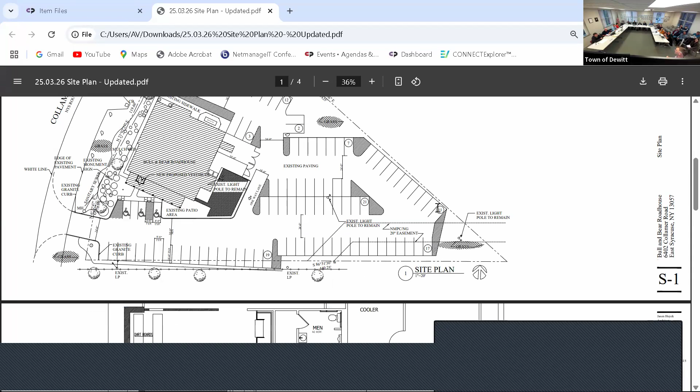Mark misunderstood what he could renovate without getting approval. Because there was an existing metal roof on it, he thought he'd change these tired old cedar shakes and put some metal up on it. You guys pointed out to him that that's not kosher, so he came in. I sent a picture in if you want to show the front facade.

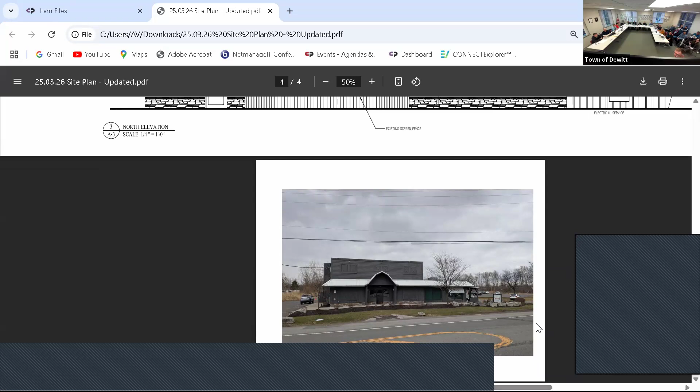You can actually see where the paint cuts across here, that light gray metal. Since we were coming back in for that, he asked me, especially after this winter - his main entrance, the vestibule opens up and cold air blows in - to show a small vestibule at the front entrance, under the existing canopy. Looking at the site plan, it's going to match the material, same board and batten, not projecting out at all. No square footage is being added, since we're now counting under the porches as interior restaurant space.

Really, we're not adding any more lighting or heat in that space - it's really just a way to stop the cold air. Any questions?

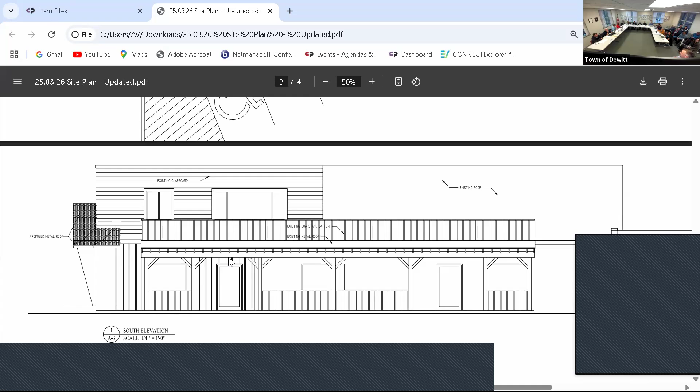Changes to the drawings that we talked about. Yeah.

Any further comments? I'll make a motion - this board approves the site plan dated 2/17/2025, with the following findings and conditions. This board approved a site plan for the site dated October 24th, 2024. This plan presents two minor modifications for a change in materials and a vestibule addition to the entry. Modifications are approved with the condition that, except as specifically modified herein, all findings and conditions of the approval of October 24th, 2024 are in full force and effect and unmodified.

Motion to approve. Kathy, Dave, all in favor? Great, thank you.

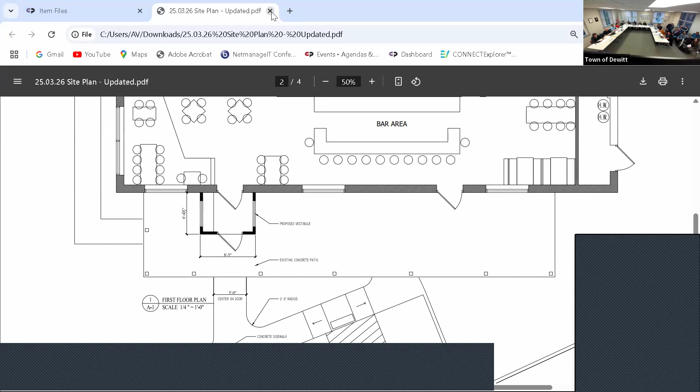Okay, I believe we have two items to finish off the review. The first one is the lighting plan, the study. Some of the areas within 10 feet of the property line were down into the range of 0.3, 0.2, 0.1 foot candles of spillover beyond. So we're not meeting that, go down to the L3.

Yes. Basically, along the road, we're varying between those levels of light, same kind of thing. Adjacent parking lot to the north is there. The creek area, which is overgrown wooded areas in the back, and the bottom down here is along

the easement, which is sort of a quasi-public street. So what we have is a very difficult site, and I think because it's an existing site, we have special conditions that can't really be met to the letter of the ordinance. The other issue is up here, there is a New York State street light, which is putting out way more than the 0.1, 0.2, 0.3 foot candles.

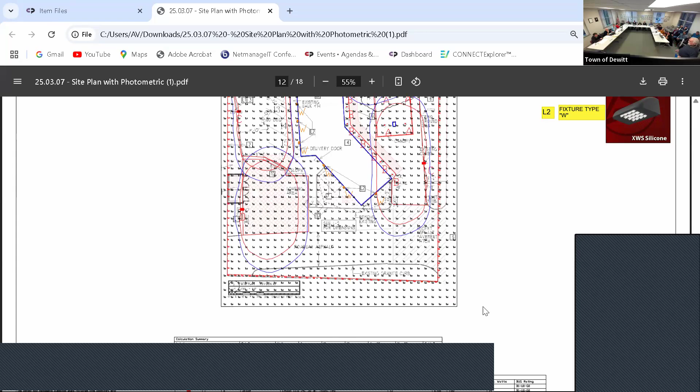Yes, the street light is a pole. This is an existing pole. That's a pole, that's an existing pole. This particular one here is a new one that the lighting designer put in in order to give enough light for the cars to go down the driveway. So that is the only new one, and again, it's cut off and we're down in less than a foot candle in that area.

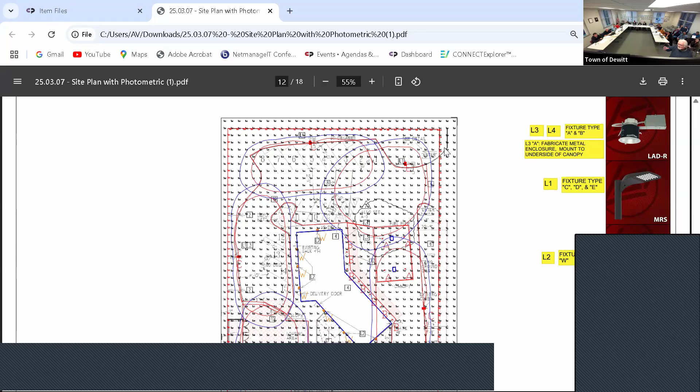So really the only issue and the only area that we have is in the upper right corner, for the most part. Not really, I mean, that's going to be the brightest part. Down here, the next street light is on the other side of the AmeriCU Credit Union. So anything that's spilling over onto that sidewalk is I think even outside the range of the street light. But yes, that corner is where it's the highest, it's the highest point through it.

And these numbers take into account the existing streetlight that we can't do anything with? No, that was not part of the study. This is just the existing and new fixtures on the site, what's contributing to what's already there. You say the spillover is 0.3 foot candles? Yeah, code is 0.1. That's imperceptible, yeah, it's a rounding error. Right.

Yes, and you spoke with DOT? DOT has no issue with these numbers, right? No, I think their comment was that they'd appreciate any additional lighting because it's very dark, dangerous. Okay, your comment was something like, make sure that they're not tipped up because that creates glare. Right.

The only other thing is, can we just make sure that the foot candle requirement for the board, we can accept it as shown. And then the only other issue that was raised today was just the signage.

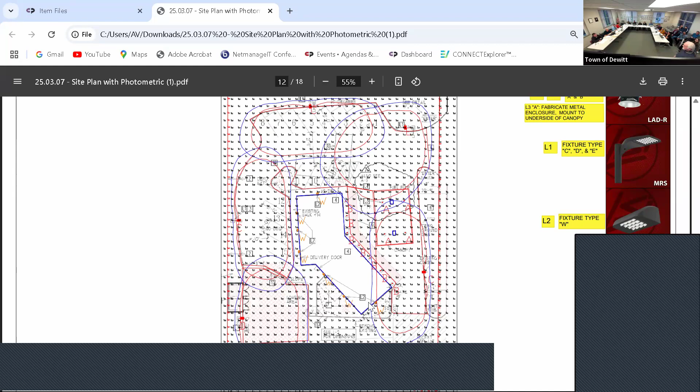Yes, go up a couple of sheets. This is site directional. Okay, this is what DOT wants, they want regular street signs. So at this point you'd basically have a one-way sign here, a one-way sign here, an exit sign, do not exit, do not enter. So they basically want road signs all the way around.

Go down one drawing. What we have proposed, it takes it a minute, were little signs that said entrance and exit. So this is just creating a one-way flow around the site. Yeah, but that's what we already had gone through, the circulation around the site, and the signs were necessary for that one-way circulation through the site.

So basically DOT wants big road signs. Right, it was set up as a one-way. I had them meet the code for directional signs, which is like 2 square feet, taller than 3 feet high, and then DOT said just... So basically they have asked for that. I'm revising drawings and sending it back to them, but tonight we just don't have the approval from DOT yet. Right, but you're doing what they asked. Yes.

Okay, I think those are the only two items we need to address. Is that on the dumpster?

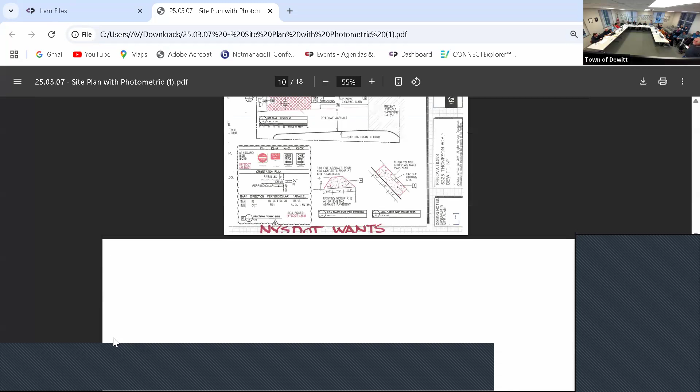Can we run through the architect? It's been a while since I've seen it. It's not changing too much, but do we want to start all the way through? Yeah, let's just give a quick overview of the architecture.

Okay, originally this started off as an interior renovation. It was originally two businesses within one building. There was a dividing wall down the center - this was sort of a fast food takeout, and this was a quick market grocery store kind of thing. The existing building is probably from 1960s to 1980s, somewhere in that range.

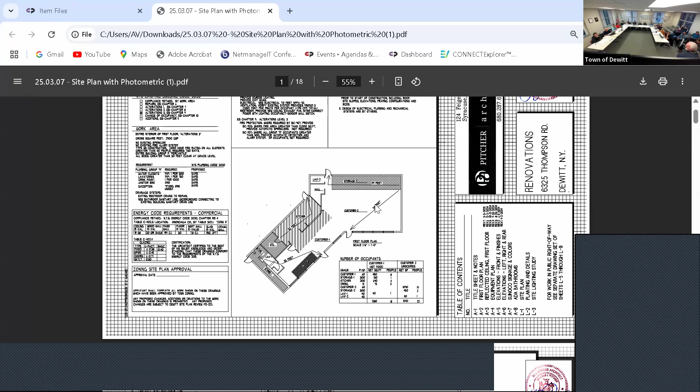So basically we're doing the interior renovations, pretty much a gut rehab at this point in time, and a lighting plan for the new ceiling. This is the typical layout - we're gonna have the commercial kitchen here, a couple of seating areas here, this is basically grocery store, and the fuel pumps are out here.

Let's go down. The color is corporate Sunoco blue. What we're doing is the existing siding, we're putting on a veneer, concrete stone veneer for the base, and then above that, we're putting on new siding, cement board siding.

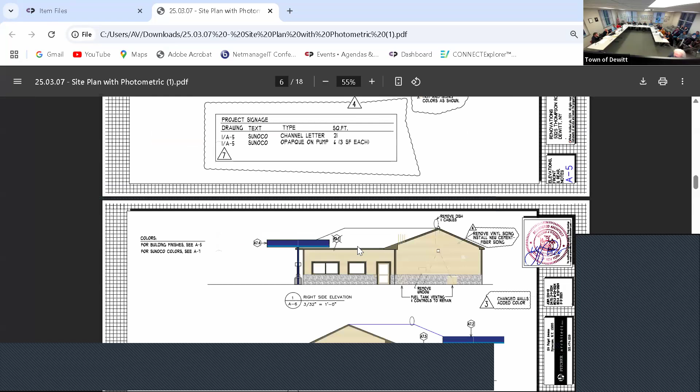But the building itself is pretty much staying the same. It's just doing the exterior. The massing is staying the same. And so we have new colors on the canopy.

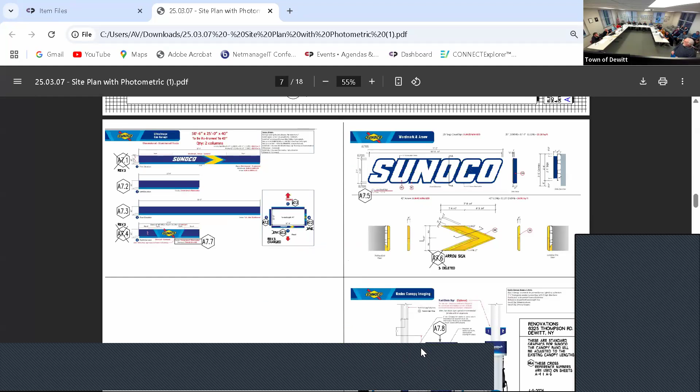We have all of this, this is the back entrances. Canopies are not being rebuilt - just being covered with the new color, with the corporate color. The existing structure is good enough.

You have a cross section through, just a typical exterior wall cross section? It's a stud wall. For the cladding material, it's going to be on the outside of the sheathing. Do you have a section? No, I didn't draw this section.

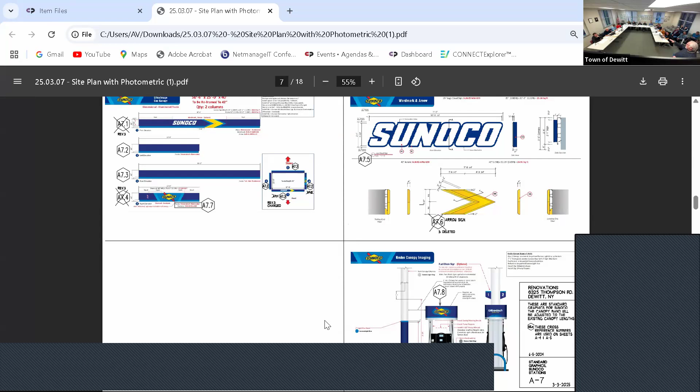How are you transitioning from the capping, just the top course of stone? Yeah, it's basically a 4-inch veneer, like a brick veneer. I'm not sure if that's what it's doing. Is it a water table band continuous, or are you just...?

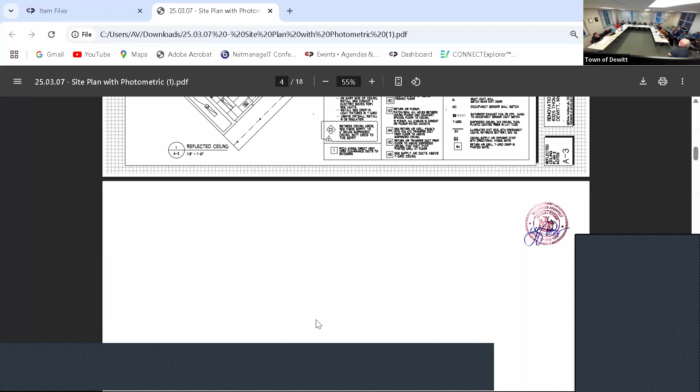They didn't show that on there. But I mean, you could flash it also. The material, the transition material between the stone veneer and the cement board siding - I didn't do anything particular, it's just the top course of the veneer. We'll have to work that detail out in the construction.

I'm gonna try going out. The canopy logos - is there any imagery on the canopy?

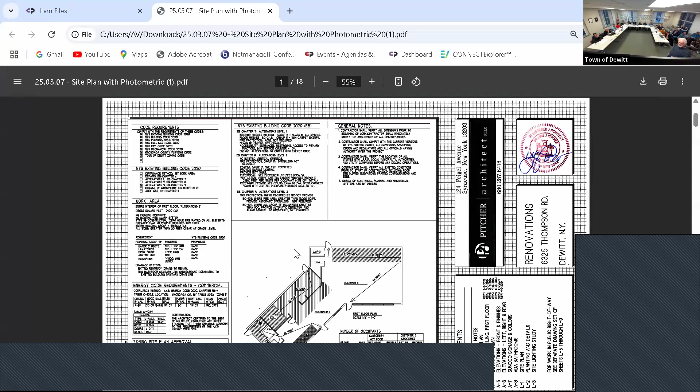If we go down to about 4 or 5 - I think initially they came in with Sunoco branding on it and then they wanted it removed, and that was removed from the canopy. It is shown further down, so we're gonna...

So it has to be modified - no, keep going down a little bit. There. Yeah, and these are crossed off. Those were things that were deleted. You didn't want the logo on there, so I just crossed it off.

So that's how you're tracking the revisions? Okay, it's shown that they're not on there, and the same with the one in the upper right. In the upper left corner of each one, it's misleading - this goes back to if we look at it in the future. The top left corner of each sheet, we'll add that no signage is permitted.

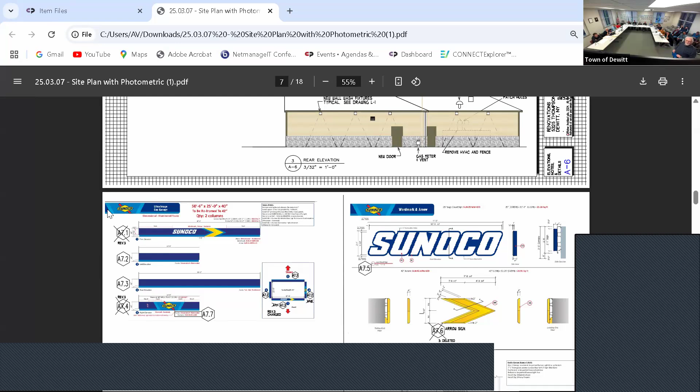Okay, let's go to the next one. What is the purpose of leaving them on and just putting an X through the call out?

That particular information is a JPEG from the corporate office. I didn't have the access to edit that image, so to show that it was deleted, I simply put that deletion on as a revision.

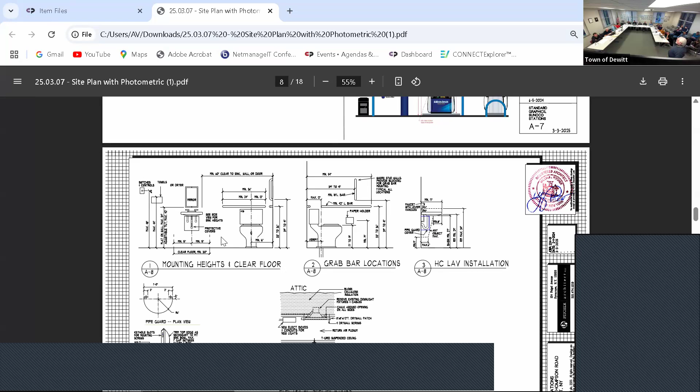We can go past the restrooms. Okay, now this particular part of the project is the worst part of the asphalt. Most of the other asphalt is in reasonably good condition.

This part is going to be redone. We're adding a new sidewalk here so that we have - basically this is a loading area so that they can load in from the rear, and it's also to give us room for the dumpster to get in and out of the dumpster enclosure.

And basically the flow is parking down, out into the street. Either way, the flow from here is through the pumps and out.

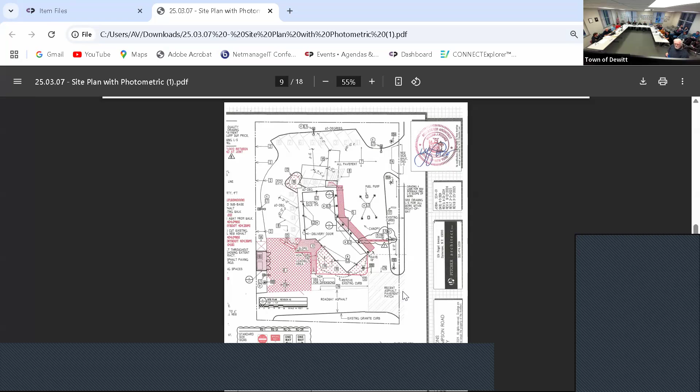The current asphalt comes up to the sidewalk with no defined edge. So we're removing about 4 feet of asphalt and revealing the edge of the sidewalk, which will have a 4-inch curb along the sidewalk separating it. We're putting in a new handicap ramp to the entrance doors and to the sidewalk here.

Light fixtures, existing and new. We're basically putting downlights on the walls, and under the canopy we have a series of downlights along the front of the building. Let's go to the next one.

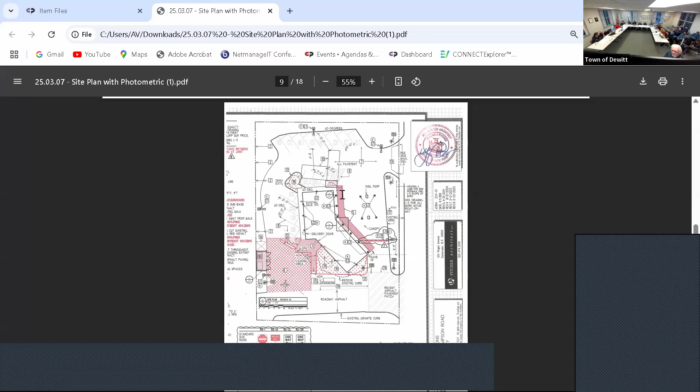That's the sign. It does not want to come back.

Okay, let's go to planting. Of the various plants, this was a particularly difficult spot. What we had in the zoning code were basically 50-foot honey locust trees, and we're sitting in a band that's about 12 to 15 feet wide along the sidewalk and the property line. So I'm proposing some very tall, narrow trees for this planting to meet the requirement of trees every 25 feet. The planting along the other parking lot is going to be several flowering bushes, towards the neighbor, and the neighbor's parking lot will have those plants. That's about it for the planting.

This is the sidewalk in the back for the loading area. You do have a sidewalk along the road - yeah, that's on the DPW drawings. With the coordination with the trees, the sidewalk is actually along the property line here, so the trees are on the grass just inside the property line, wedged between the curb of the pavement and the sidewalk.

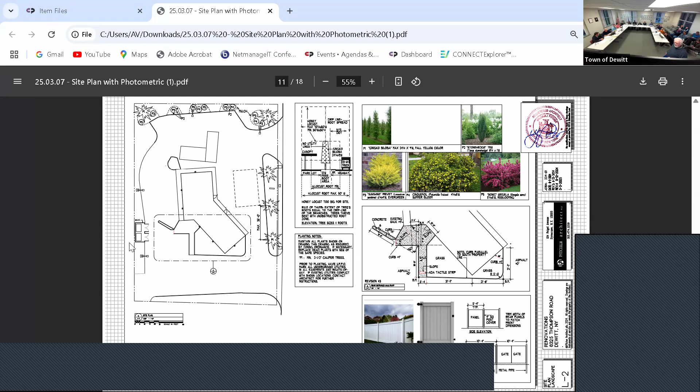The fence for the new dumpster fence will just be a vinyl fence. Next one is our lighting.

Okay, this is all of the DPW stuff. Basically they want us to treat this one as if it's a driveway, so it gets a new concrete sidewalk cut into the asphalt. They want to treat this one as if it's a street, so that's just simply a painted crosswalk at that point. We're going to be putting in the sidewalk along the street curb, and we're going to put in ramps at each of these - that's an existing ramp there. They want a stop sign and stop bar. All of these arrows show the flow around the site, how the one-way works, so this diagram shows all of the site work.

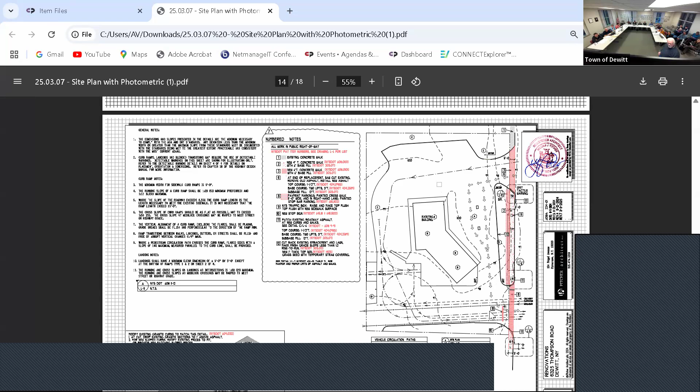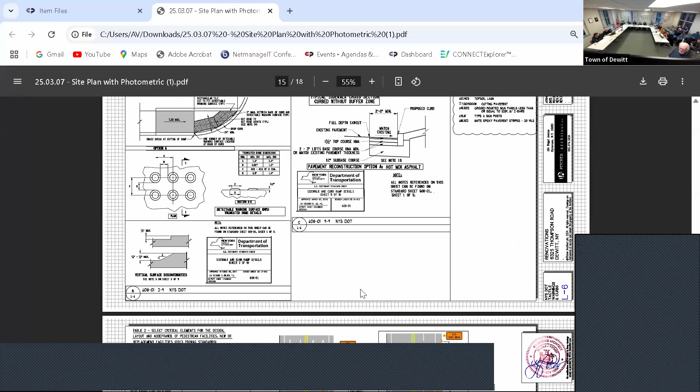This is the typical handicapped ramp - it'll come down to a ramp, tactile, dropped curb, and then either the asphalt or the sidewalk. These next ones I don't think really do much for you - it's the handicapped, typical DOT stuff. One more, and we have in here...

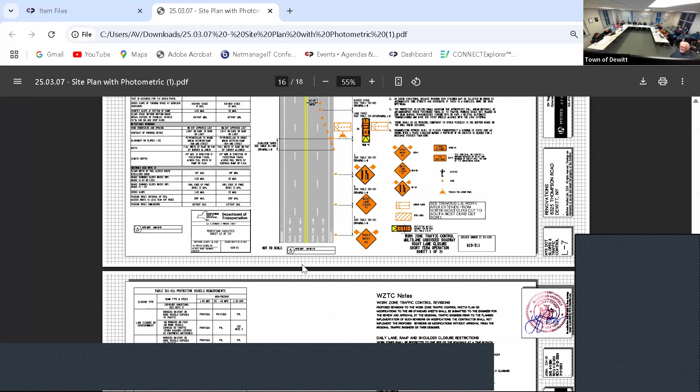We have in here the traffic plan for when they do the curb work and we have to close down the one lane. The DOT and I would work that out. Okay, that's pretty much it. Any further questions?

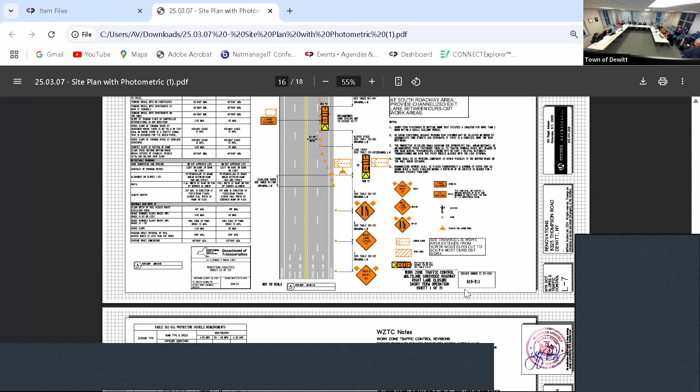The ginkgo trees - a lot of times the varietals come in males only, because the females have a fruit that will drop on the sidewalk and stuff. So specify that, yeah.

Good, so we can... I'm looking up, is there no additional comments?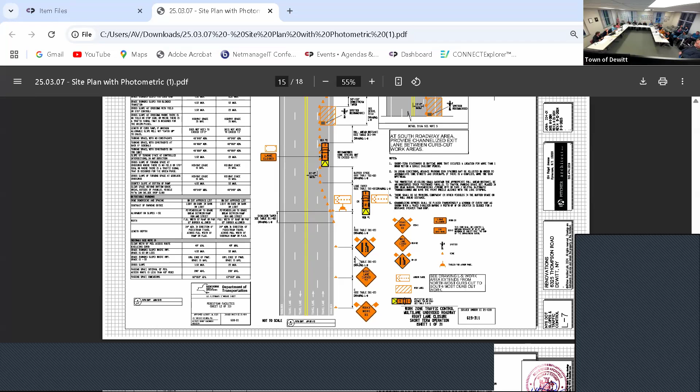I think you need to clarify, going back to the stone - if it's not clear on the drawings what you're installing, you can't wait till construction unless you're gonna come back to the board to clarify how you're gonna build the exterior cladding. So I think we need to put that in the minutes, stipulate it at this point.

Sitting on, the stone is thick - what's it sitting on? A wood frame building, which means the frame is right up to the foundation. I would just like to see that top band kind of articulated, not just the ending of the stone, which is kind of a coursing - just to have a clean line. It could be a precast element with a drip that carries all the way around. Yeah, it's the water table that sits on top of the stone. We can basically do that with a concrete block, a flat block, to match the color of the stone. I think we're talking the same thing - it's a precast element that typically comes with your stone veneer, a water table cap, pitched. It would have a slope. Yeah, we can do that.

I'm just gonna jump back to the soffits at the front left corner - according to the pictures, it's destroyed, so I assume you're reframing the subfascias and all that kind of stuff. That's an old photo, it's already been rebuilt - the structure's all there. We're just putting new siding and new veneer on the existing shell.

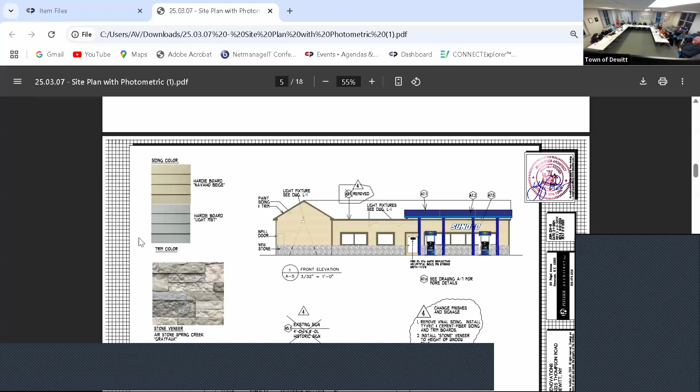This is a refurbishing of a vehicle service station, which is a permitted use in the zoning district. The applicant and board have acknowledged that this is a tight site with an already existing structure. The applicant has worked with the board to redevelop the site, use considering the constraints of the site. This board recommended, and the zoning board of appeals granted a variance on November 25th, 2024.

To allow for 15 parking spaces on the site where 19 are required by code. This board has reviewed the Onondaga County Planning Board referral of 10/23/2024, which determined that said referral will have no significant adverse intercommunity or countywide implications. This board has reviewed the SEAF of applicant dated 5/11/2024 and grants a negative SEQR declaration for this unlisted action. The site plan dated 3/3/2025 was modified to include changes to the directional signage and accordingly the entry exit scheme for vehicles as requested by the New York State DOT.

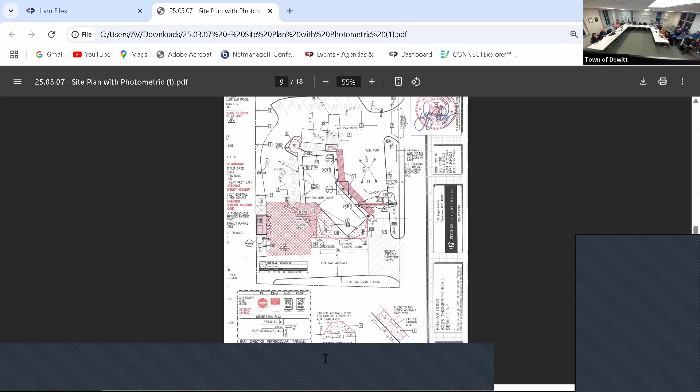All right, National Grid. There's something.

Hi, how are you? Good, how are you? Good. Kathleen Bennett, Bond, Schoeneck & King on behalf of National Grid.

The fence detail, I had trouble figuring out which drawing - it was recently updated, right?

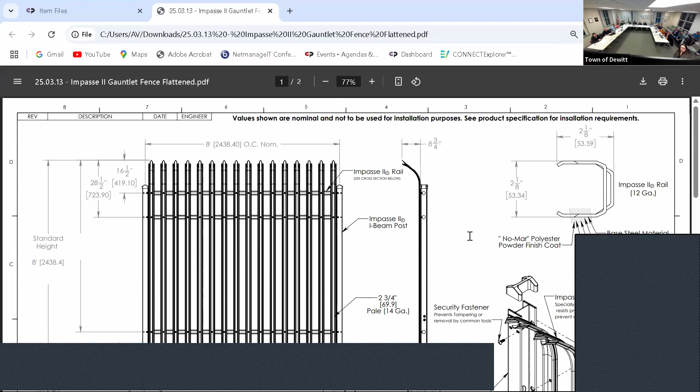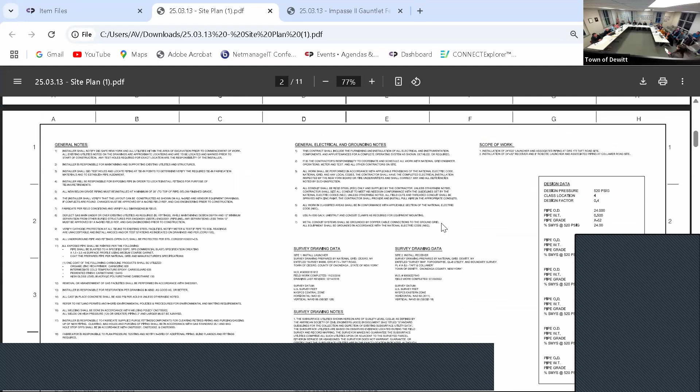Sorry, and that's James Coffey. I didn't realize he was online.

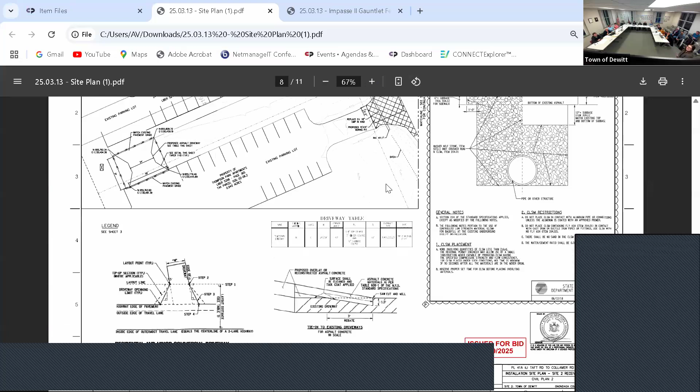And then they can provide the cut sheet behind it, with the drawings. It's right on that page there, about mid right. Yes, the cloud matches up with the cut sheet product. Correct. And the most recent cut sheet we submitted, we took off the references to all of the others, so it would be the same.

More questions? So it sounds like the DEC process is faster than anticipated, it's moving. Got it. Yeah, we got the permit. We're still in projects, so-

They also weren't impacting the wetland buffer, and you guys got your permit in pretty quickly. We're not sure.

I did mention it to a couple of applicants and they're like, what? It did take almost a year to get the permit. Well, you knew there was wetlands there, so you guys were already working with them, it wasn't like, hey, you need to submit this. You had the permit application in prior. Yes, okay, that makes sense.

They were just waiting for this board to do the SEQR to complete that permit process, so.

Okay, I've got a little bit to read here, so. There are no other comments?

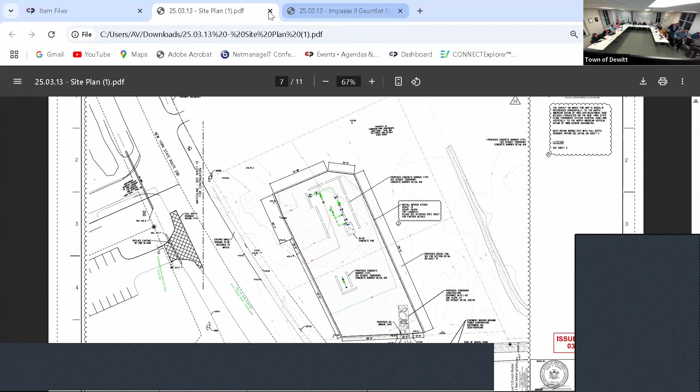Okay, next up, First Tee Clubhouse Addition.

Hello again, welcome back. I know Peter gave everybody a little sheet explaining what the First Tee is, but does everyone know roughly what the First Tee program is? So a few years back, the First Tee took over the property and had the outdoor golfing.

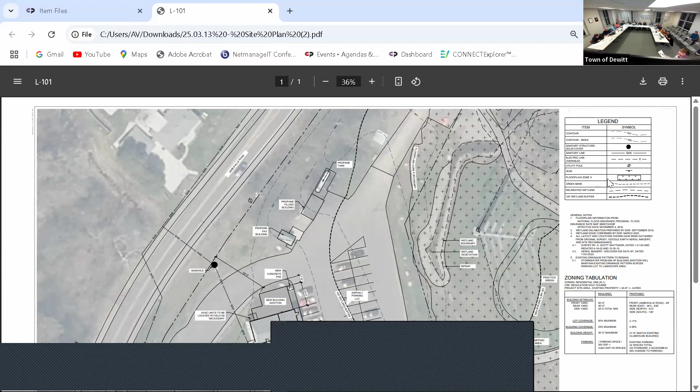They found that they needed, on rainy days, to expand their seasons. They wanted to put an addition on to get some classroom spaces. At the time, we built this classroom, more of a conference room/classroom. It's worked amazing. The program has grown tremendously, and at this point they have an indoor simulator they use for rainy days.

They needed a space to have a second indoor simulator and another classroom. The population has grown to the point where they need more space. Not really trying to bring in more people, it's trying to accommodate the people they currently have. So we put an addition on the back.

It kind of matches the roof lines, but a little bit differently. This one has a gable roof here with a little shed coming off on that side, then there's this gable roof running 90 degrees. For this one, the gable roof runs the same as the front portion, but this is more of a shed roof on this side and the gable there, so it shifts just a little bit, but the materials are gonna be the same: clapboard siding, painted the same, same roofing.

It's the same scale to the whole structure, and you really won't even notice the difference. You won't be able to tell what's an addition and what's not. So that's what we're looking for. Go to the architectural.

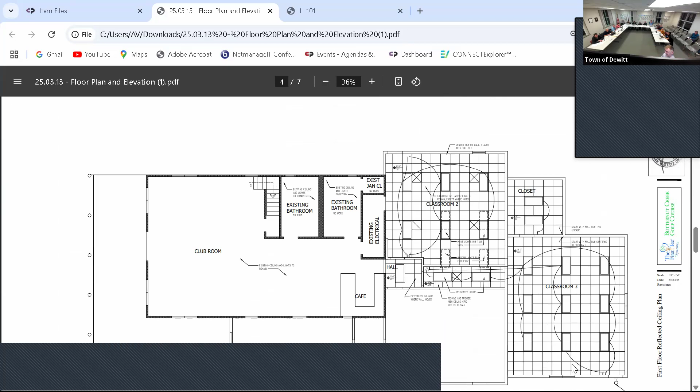So when we're looking at this, we should probably have you modify this one. So this is the classroom, this is the addition, this is all the existing building.

On the first part, can you just graphically make it clear what's new and what's existing, making new darker and existing lighter, just so that it's clear. That's all really the roofs. When it shows PDFs the line weights get messed up, but I can gray it. Yeah, if you wouldn't mind.

The bottom right, we've got that extra set of double windows there, which is underneath the porch. So that doesn't actually exist, which is the same on the other side.

Top left, you're just over to the left too far. Top left, bottom right, those two. You're not proposing to infill that porch facing the driving range, correct? No, it doesn't go to there. Actually, let's go back. I'll be honest, I didn't look at the existing, it was from a long time ago.

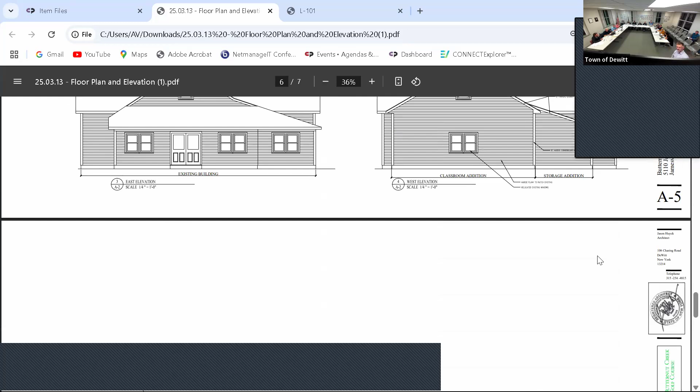So this is the existing ridge. That's that old addition with the cross ridge, but this new addition's ridge is here. So like I said, it's kind of mirrored. The pitches will be the same, right? So these should be 7/12.

Actually this was 8/12, so it was slightly different, that's right. I was trying to keep the eave line, it got wider, no this is wider. I was trying to keep that ridge lower, so that's why I had to shift it down.

If I go to 8/12, it's gonna be higher than the other one, or you'll have to push down on the eave lines, right, but they need the 10 foot headroom for the indoor driving range.

Oh, no, that's significant, right? No, okay.

Materials all match, windows will match. Any of the lighting on the building, I think I saw one wall pack — we're doing, I'm sorry, we're just doing an emergency light over the door, lighting for egress.

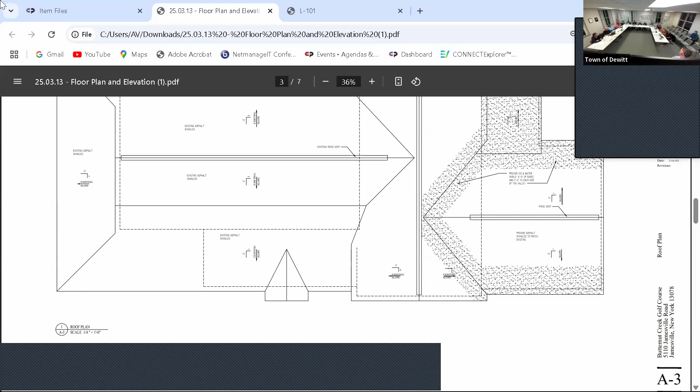And will they have the site plan on it? Yeah. Yeah, the units will have to be pushed over a little bit. Yeah, they'll have to be relocated. No, no, you gotta go to the other- we gotta go to the site plan.

Yeah, this top- excuse me, Jason. There, well, you can see the well runs through. Yeah, so those will end up probably just getting swung, either kept right there or swung right around the corner here. Remember, this is a pretty steep drive, so you're not gonna really see it in that area. I think as long as we cut it off and make it so it becomes- none of that can be seen from the road.

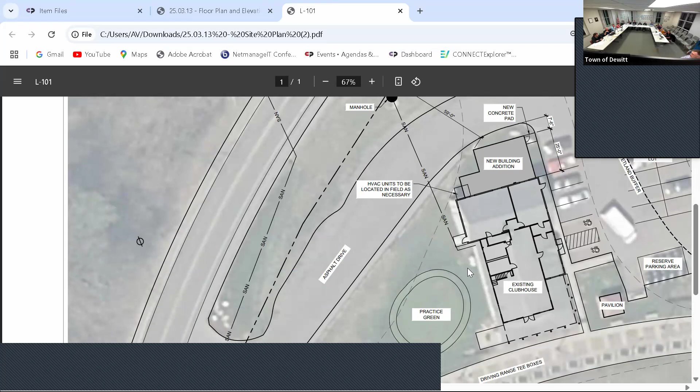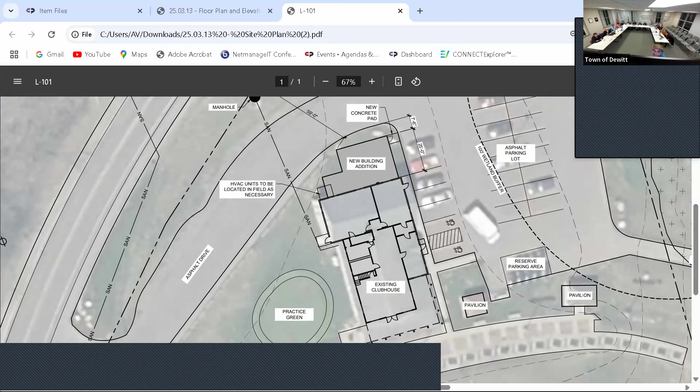So with respect to the DEC delineation, can we talk about that briefly? We had our group go out and walk it just earlier this month, the wetland over in this area, if we pan to the right. Just to do a site walk and reconnaissance here.

And then this line represents our 100-foot buffer. So we are outside that. Yeah, we have no work inside the 100 foot. Correct, no.

So the assessment that they're putting together for DEC, can we get a copy of that? Sure, yeah. So what's the procedure here? Is this going to need review or not, because we're not touching anything, not doing anything in the buffer? It has to go to DEC. So it has to go to DEC, but we don't necessarily.

I think we have similar language we did for another project, right, where we're like, hey, if there's a problem, you gotta come back. We can come back, but if we don't think there is one.

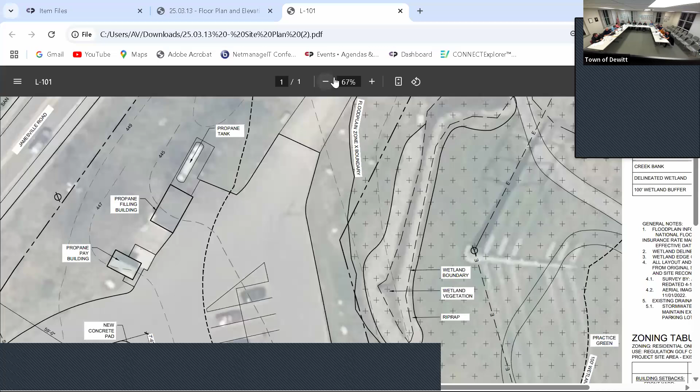Any other questions, comments? No. Thoughts? So, update the drawings, the next deadlines. April 10th. So, by April 10th, have your next set in.

I mean, what's our county? No, there's no issue here, so it should be pretty straightforward at the next meeting. Thank you, all right? I appreciate it. I say next meeting, 2 meetings, right? Yeah, the 24th, your next meeting.

Did it go to county? Yes, on for the 9th. Great, thank you. Okay, thank you.

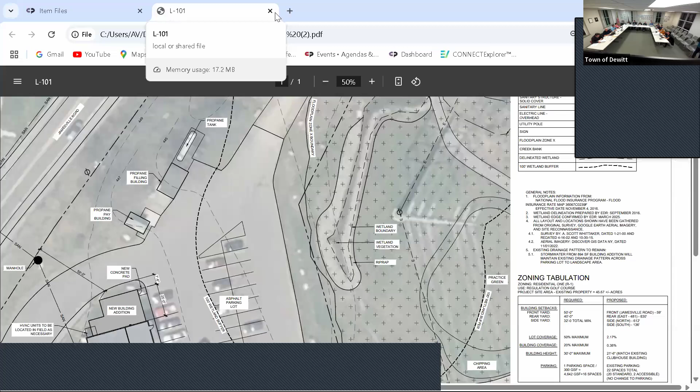You're all handed some language for multi-tenant rear and side door identification. This is something that the planning department, we talked a little bit about it on Tuesday morning, is looking for.